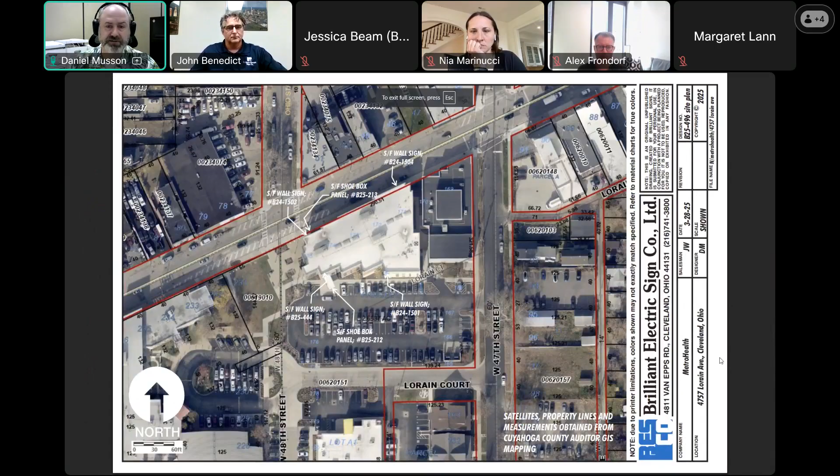So John, just let me know when you want me to click through the slides. Okay, we'll do. Hi, I'm John Benedict, Brilliant Electric Sign Company. I'm joined by Sharon Schaefer from Metro Health. And we're presenting a sign package for replacement signs. This is part of a complete rebranding for Metro Health.

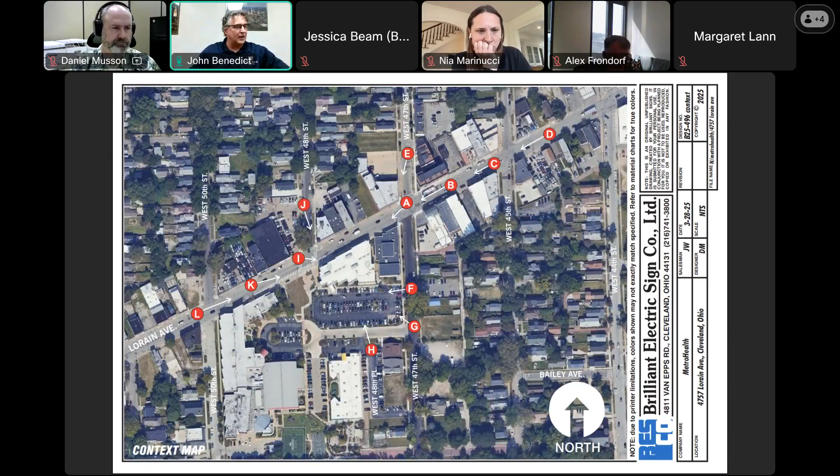What you see here is the overall site map. You can go on to the next slide. And this is a context map, and these are all going to be used on the upcoming slides as you approach the facility. You can go on to the next slide and get a sense for what the current conditions are. Next slide, please.

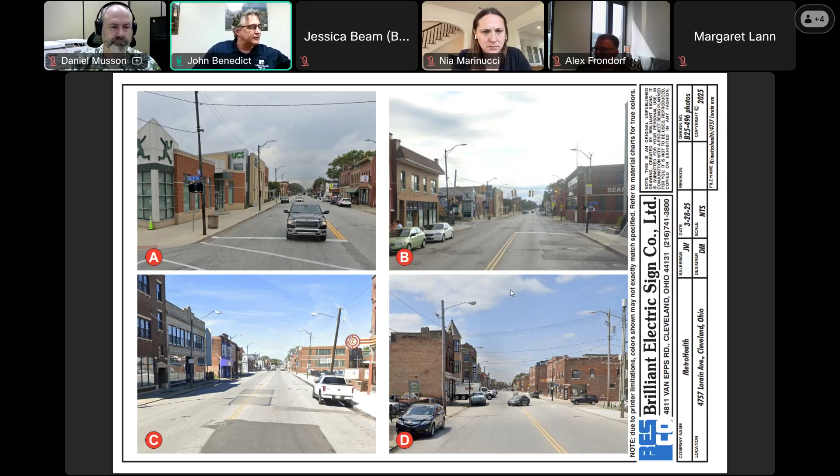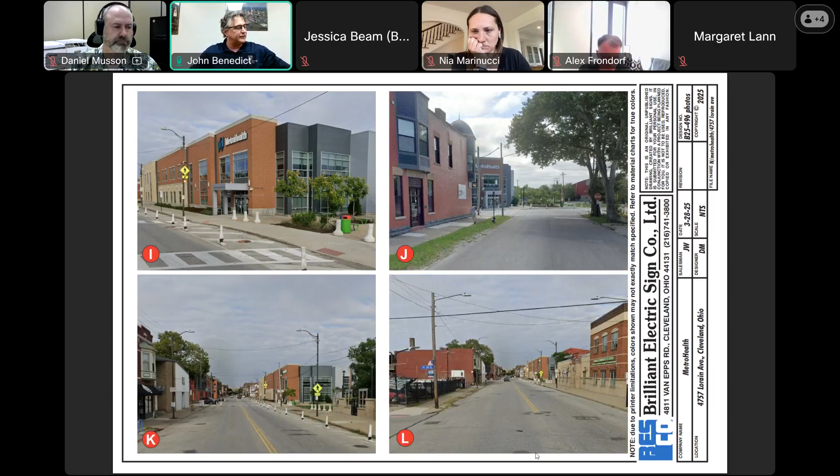Next slide. And this will show some of the current signage that we will be replacing, again, as we approach the campus.

Next slide. Okay, what we have here is our first sign. What we're doing is replacing the existing wall logo and letters with single face internally illuminated aluminum wall signs. The copy is routed out and backed up with acrylic graphics, all flush mounted to the fascia of the building. The face, background, and cabinet are to be painted with Matthews brushed aluminum.

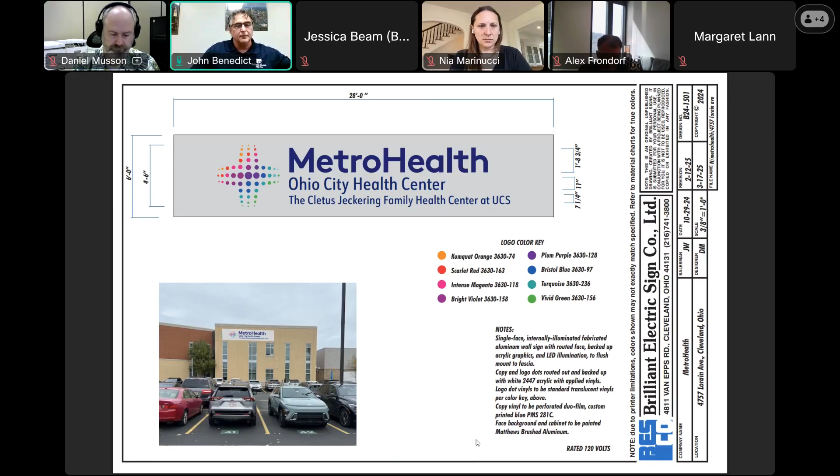Next slide. This is showing the detail of the construction of the signage and the mounting detail as it's mounted to the building. Next slide, please.

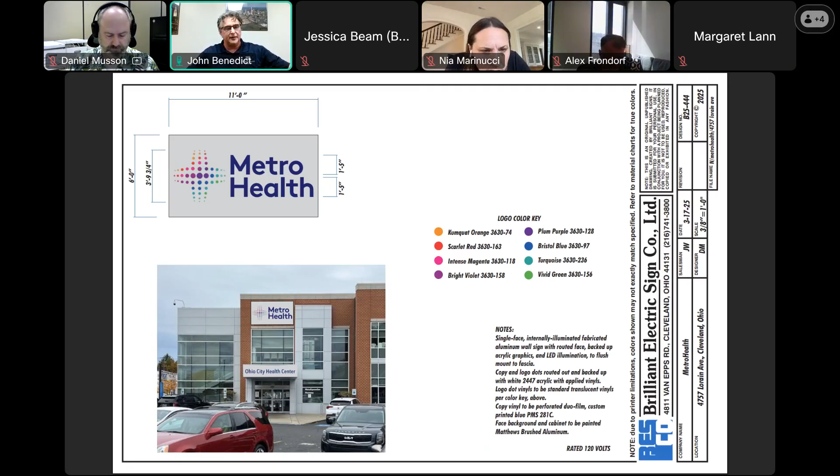This is another sign cabinet replacing an existing wall sign and letters. Similar construction, again single face, internally illuminated, fabricated aluminum wall sign with routed out lettering, so only the lettering and logo will illuminate. Same construction as the previous cabinet, just on a different elevation.

Next slide, please. And again, it's the construction detail. You can move forward to the next slide.

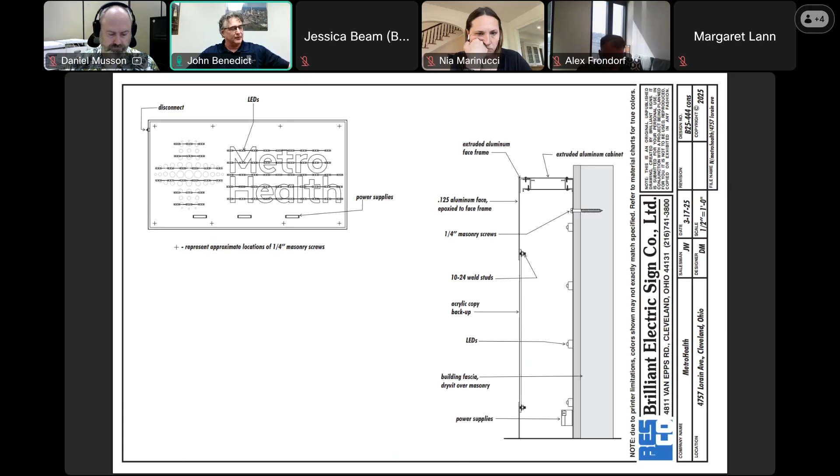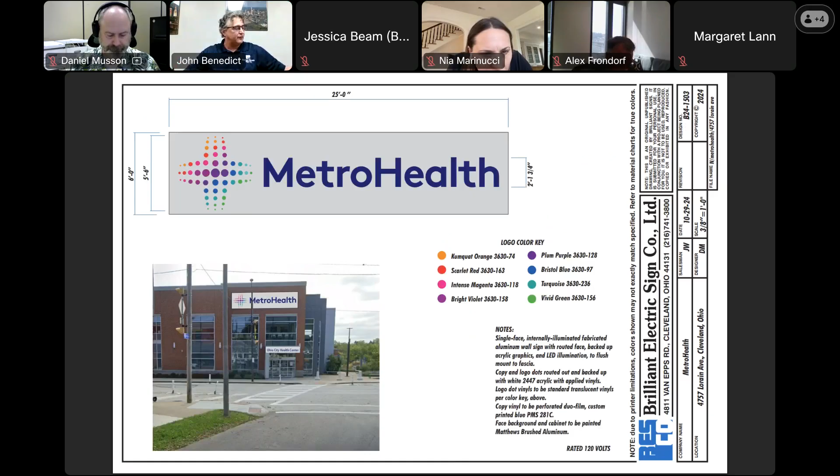This is showing another one of the replacement wall cabinets. Again, it's the same type of signage, in line with the new corporate branding for Metro Health, and it will be mounted on the fascia of that building. Same signage detail. Next slide, please.

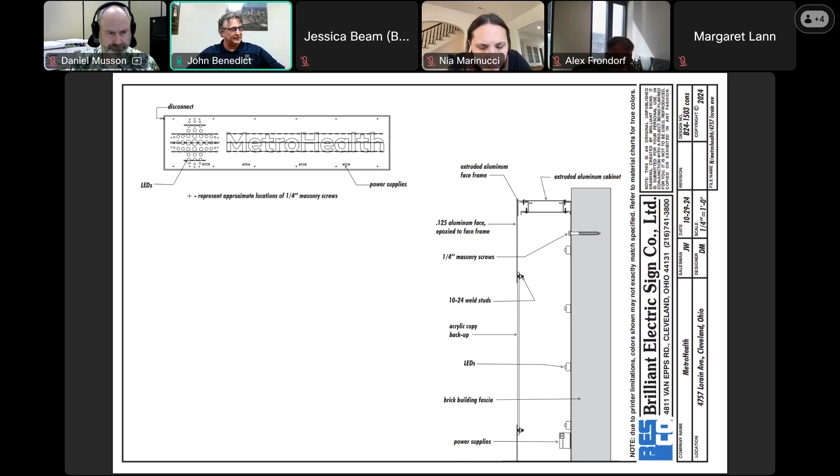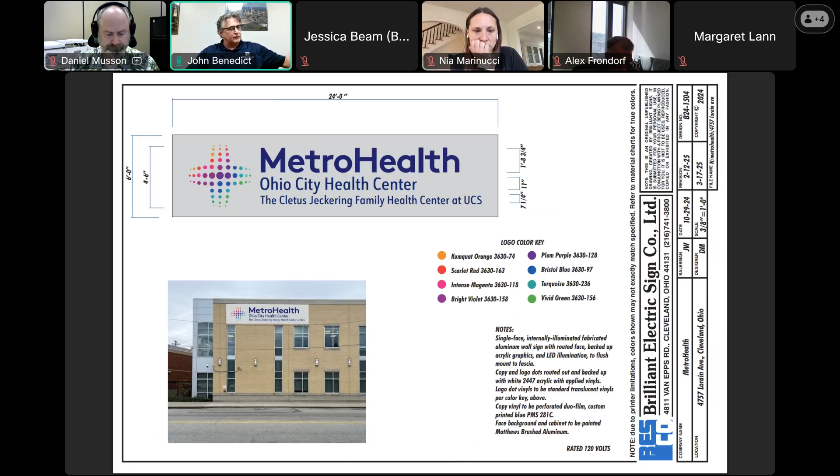This is the other elevation. Again, it's a similar type of construction and similar cabinet as the other signs. Next slide.

And it's, again, the detail. You can move forward to the next slide.

We're replacing the signage on the canopies with these, which are not illuminated shoebox cabinets, but the lettering will be similar to what is shown on the internally illuminated cabinet signs that we're replacing, though these will not be illuminated. They kind of fall in line with that same style branding and focus on the new branding.

Next slide, please. Going to be the next one, with the other canopy signage for the Ohio City Health Center. And then I believe there's one more slide.

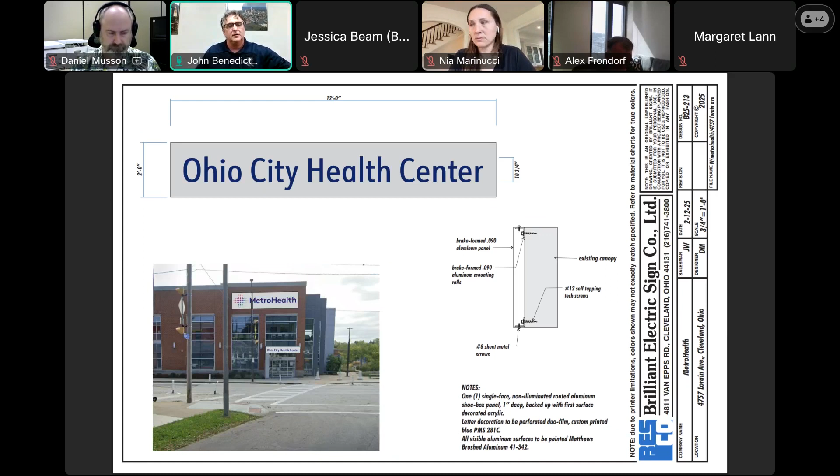And this is showing the existing signage that we are replacing. Part of the initiative here is, and I think Sharon could probably speak to this better than I can, why we have chosen the cabinet signage as opposed to the individual wall signage and lettering.

I can definitely speak to that. We chose the cabinet signage particularly across the system as we're dealing with a variety of fascia. Some are brick, some are contemporary, some are much older. We were looking for a system that would be subtle and would transcend across all the various types of architecture we're dealing with. Replacing it would also help us cover where the existing cutout letters are and the damage done by them, so it would help cover any of that damage effectively.

Thank you, Sharon. Does the committee have any questions for us today?

Thank you for the presentation. I think I gave the same feedback when you guys replaced the signage for the dental clinic, in that I really would love for MetroHealth to consider the use of the Spanish language on this facility, knowing the clientele that goes there. I don't know if there's an opportunity, like in the area that says Ohio City Health Center, to slide that text up a little bit and just add the same text in Spanish below.

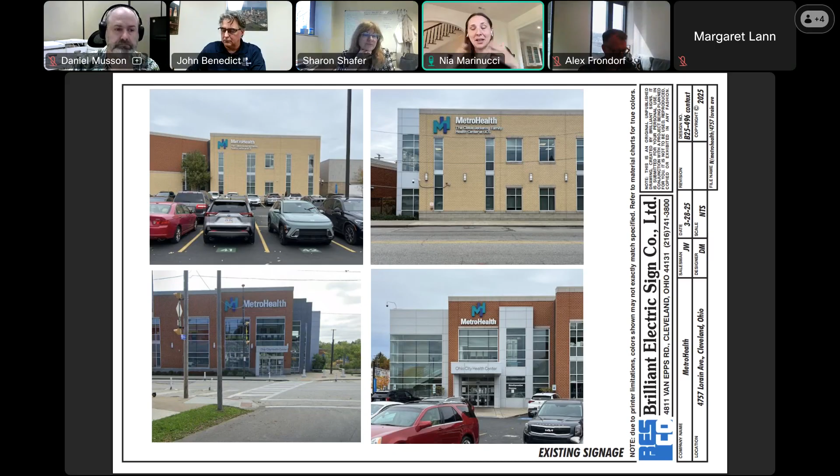I know you guys have the wayfinding and the vinyls inside the health center, so there's a lot of language inclusivity on that wayfinding level, but that's really the issue that happens for the school and for the users here. So thank you for the consideration. Oh, thank you for the feedback. Yeah, thank you.

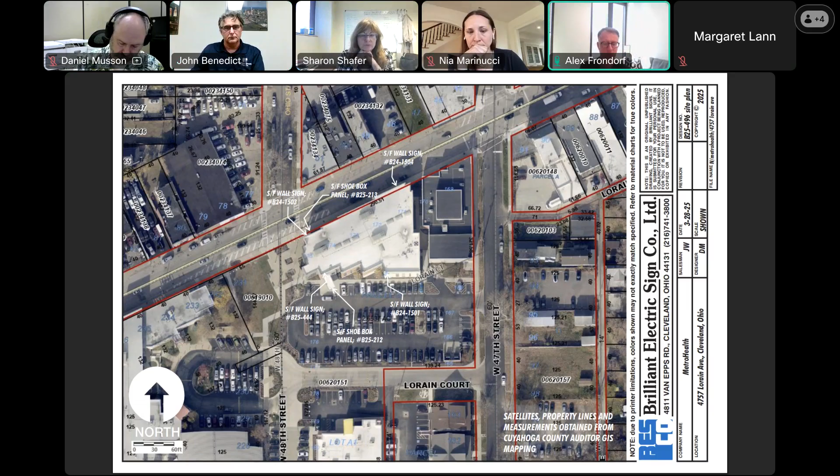Do any of my other colleagues have comments? I don't, and if no one else does either, I can make a motion. I move to approve as presented with the consideration given to Nia's comments. I second.

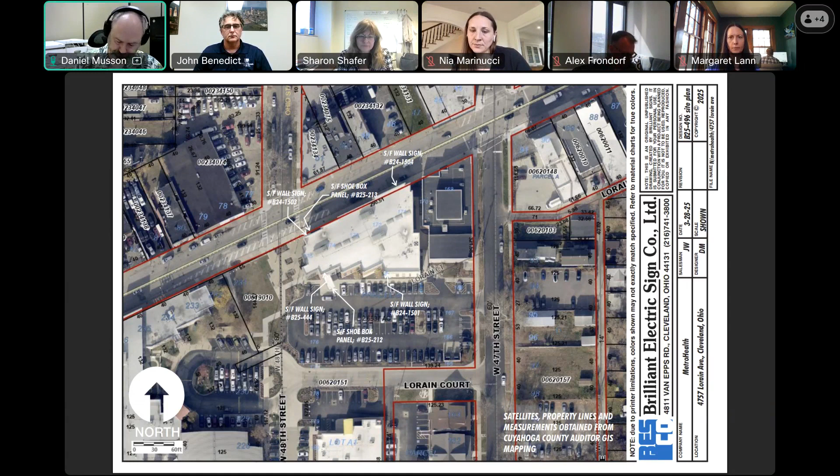All right, not seeing any other hands raised or hearing additional discussion. Ms. Anderson? Yes. Mr. Frondorf? Yes. Ms. Lann? Yes. Mr. Trivisonno? Yes. And Ms. Marinucci? Yes. All right, Madam Chair, the motion passes unanimously.

John, since this seems pretty straightforward, just switching out the old signs for new signs with the new branding, and the committee didn't have any issues with it, we can handle it administratively from here. Not sure if you guys have a pending permit yet, but I'm happy to sign off on it if there is one, or when it pops up. Yeah, we'll be submitting it officially to the building department ASAP.

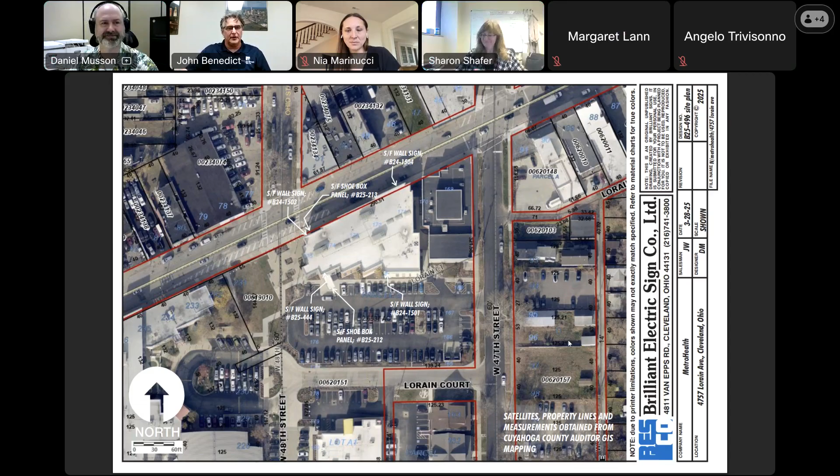All right, next up in our last agenda item for the day is case HOC 25-17, 1889 West 25th Street in the Market Square Historic District. It is a mural on the side of the, I guess, soon to be former Soho building, soon to be Chipotle, around Gould Court and Lorain. So I believe we have Abigail Arnold here.

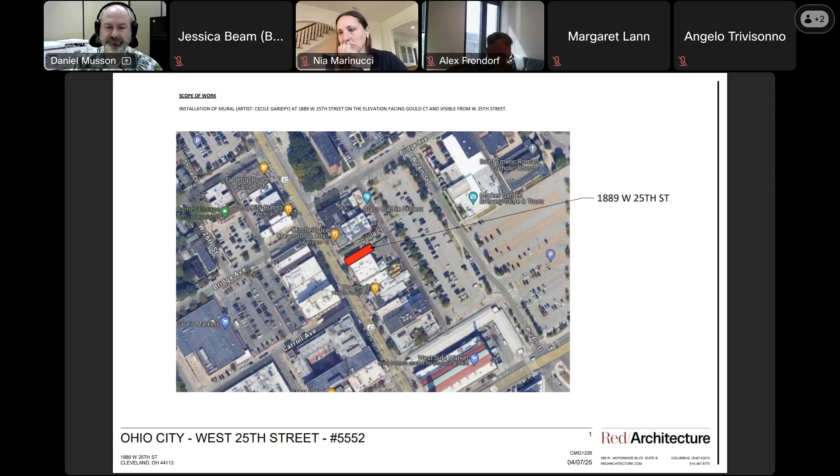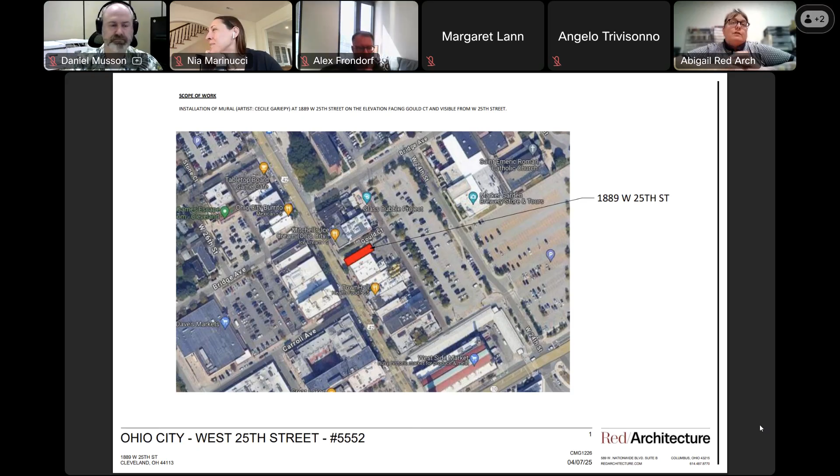So if you want to walk us through your presentation, Abigail, just let me know when you want me to switch slides. Okay, sounds good. Good to be back. We did the previous presentation on the whole idea of Chipotle being here earlier, so we got the details for the mural put together, it just took a little longer. This is a good site plan showing the location, the address, how the street runs across the front, and the parking lot in the back.

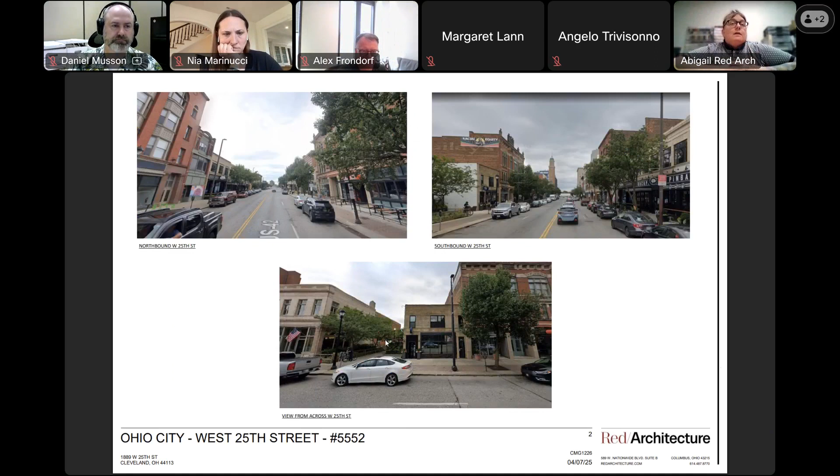Here you get views up and down 25th Street both ways. Going northbound, you're not really going to experience it, but southbound, you can see the white square on the left side of the image there, that's where it's going to be. The other view here is across the street, next to that patio area.

So for materials, the brick is going to be at the bottom to have something durable, since it's going to be next to some bike racks. And then there'll be stucco, trying to get that color that existed before.

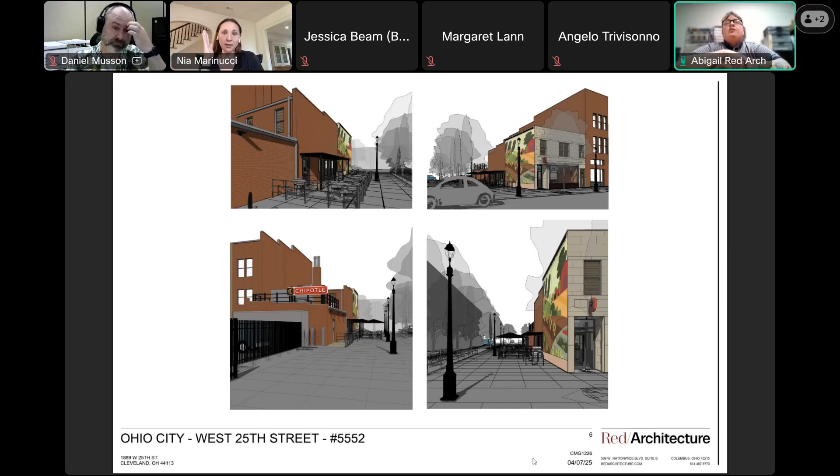I also wondered - would that cause a drain? Are you saying that's an application like a drainage mat between the historic stone and the stucco that would allow moisture to drain? You put like a fluid-applied barrier, so instead of a physical mat, it just makes sure there's no penetrations, and that keeps the moisture beaded outside of the masonry wall and going to the exterior.

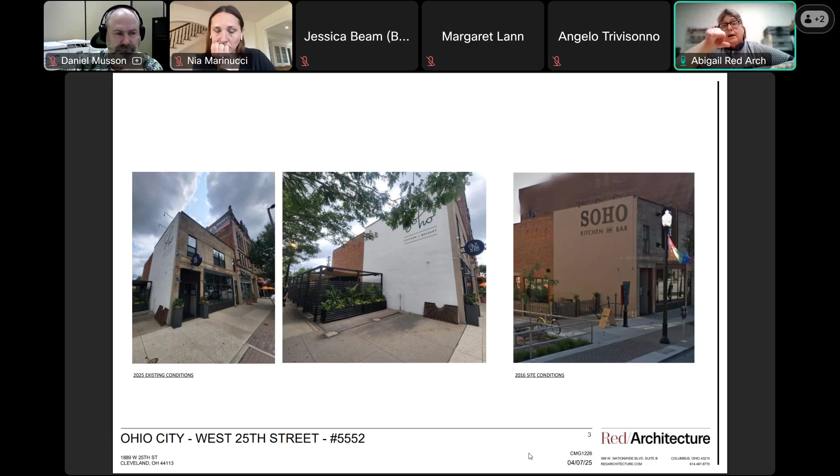The stucco finish itself is not as permeable as, say, an EIFS, where moisture really goes in because it's a plastery, more cement-concrete style setup. But it still obviously has moisture because it's an exterior thing, so you use that fluid-applied barrier behind it to keep that moisture moving down. The thin brick will have the same application - the bottom 3-foot band of thin brick will be the same setup. It won't be like traditional brick, it'll just be an applied brick, and you'll still have that fluid barrier behind it, so no moisture goes into the building that way.

If that answers what you're asking - I think so. I'm not sure if the onus of this committee is to protect the original material, so I'm trying to understand if this is allowing any moisture within the brick or stone, whatever it might be, to shed without compromising the integrity of that material.

It definitely won't compromise it. That was more relevant to our original plan when we were just putting stucco on it - I had some of those details. I didn't plan to include that here, but I could definitely show that. There's just a detail I could show you of how it has that fluid-applied barrier behind there.

Honestly, currently that wall that exists is not in great condition. I think a building used to be there, so it's not like it was pretty at one point. It's a barrier wall, originally a party wall. There was a building there up until the late 90s, early 2000s, but for the entire life of this building, there was something next to it. Beyond the mural aside, I think that step is a major upgrade, and we're doing the best thing we can for that condition. It's going to be better than it has been. And then the mural just sits on top of that.